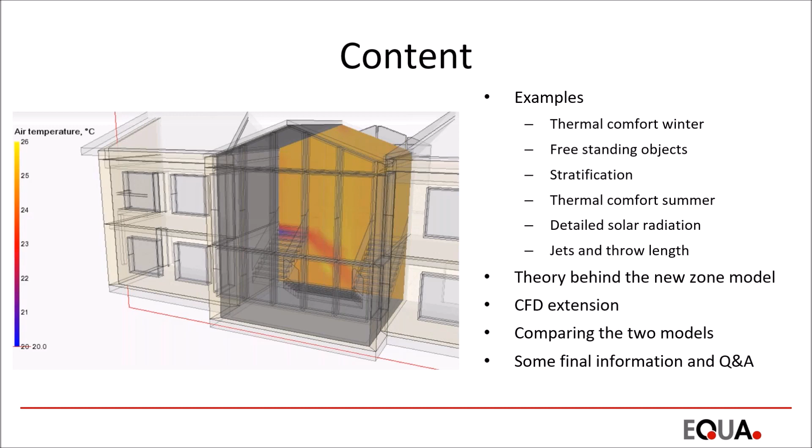So I'm very proud to show you this. Detailed studies in atriums is something I have requested for a long time, and it's so useful. So I will just dig right into IDA ICE and show you some examples. Let's start with an atrium.

Let's just import a file, an IFC file that I know includes an atrium. It's not that complex an atrium, but still it's a pretty normal case, I would say. So we start with thermal comfort winter - that's usually how I look at it: winter cases, summer cases, and then the whole energy simulation. I will not do that today.

So here we have the imported IFC. I convert the zone to a geometry, and here you see it. It's not that complex, but it has a complex roof shape and some triangular windows. This is nothing we could have simulated in great detail in IDA ICE 4, but in IDA ICE 5 we have these detailed zone models. So let's look into that.

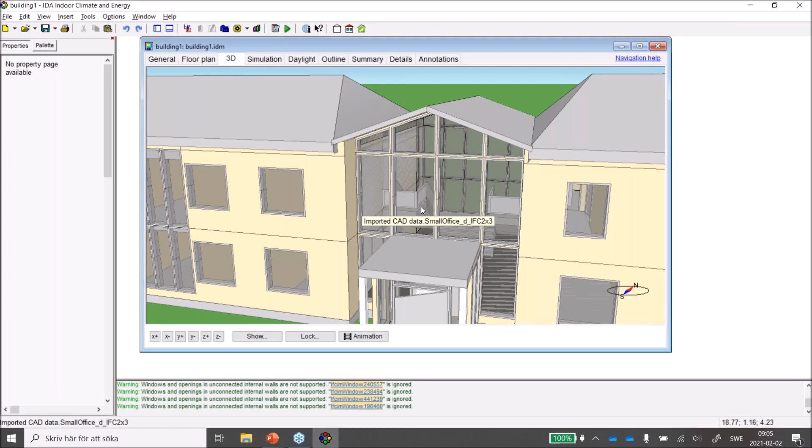So it's an atrium with big glass areas, so I think we'll have to heat it quite a bit to have good comfort. Let's say 22.5 degrees, and we need a heater - let's say 10 kilowatts maybe, and make it purely convective.

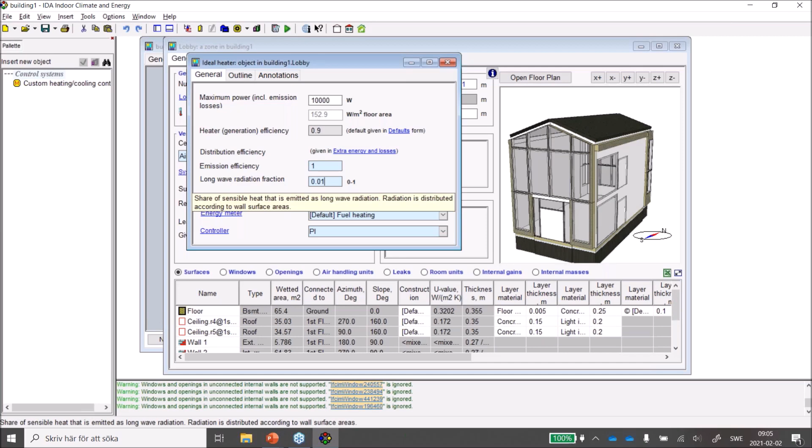I'm interested in the thermal comfort on the floor, or near where people probably may be working. So let's add a sensor plane or measuring plane - maybe you've seen that in our daylight tools previously, but we don't want daylight now, we want the new zone model. So we set up a measuring plane 1.1 meter above ground, and we want it to cover the entire space. Let's see if you can see that - maybe you can see this sensor plane here.

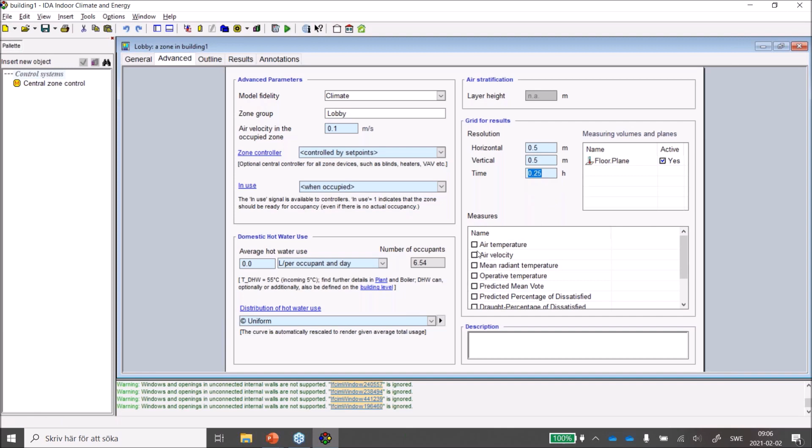We're almost done. We have the atrium, we have the sensors. Now we just need the most important thing, and that's changing to the new climate model. Here we can also increase the resolution of the grid if we want - right now it's 0.5 meter, and we log every 4 times an hour. I want to log air temperature and operative temperature. I think that's good enough for now.

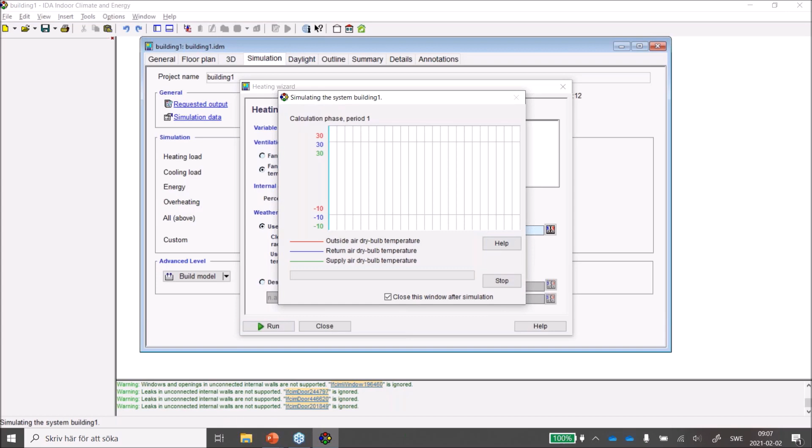So let's go to the simulation. It's a winter case, so let's make it really cold, minus 16 degrees. We have some internal loads as well, but they won't affect it much - just a few people in the room. And we are done. I just need to save that.

And we can look at the results. Let's take a section cut, and here you can see the sensors - these little black things. Let's hide them, and we can log the air temperature, and hopefully it's at set point. And yes, it is - 22.5 degrees. Nothing exciting there.

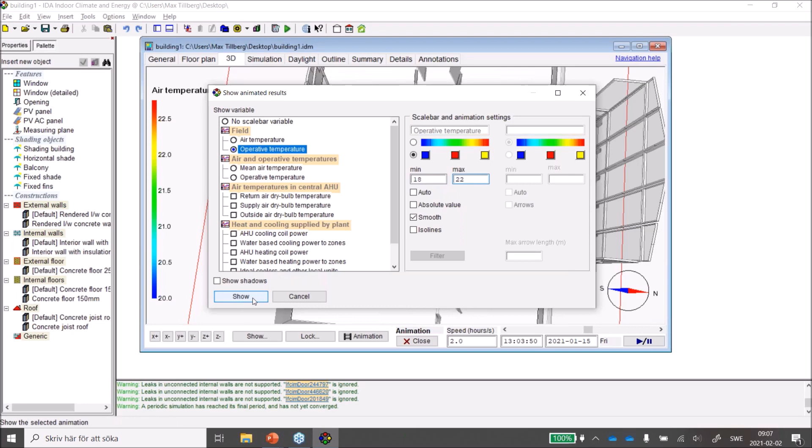But let's look at the operative temperature instead, and make it maybe 18 to, I'm guessing here, 22 degrees. And yes, so you can see here we have the effect of the cold windows in winter - here, here and here - but still we have the same air temperature in the entire zone. So let's look into the details, and we say, okay, this is what we would have gotten from IDA ICE 4.

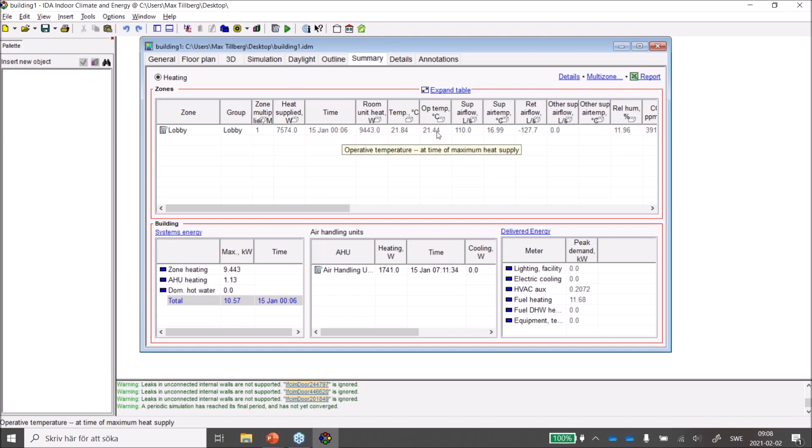It's an operative temperature of 21.5 degrees, so probably you're happy with that. But let's say the customer wants at least 20 degrees operative temperature to make the tenants happy. So we can log that. Just press here and see, okay, so 12 square meters of this entire zone was too cold.

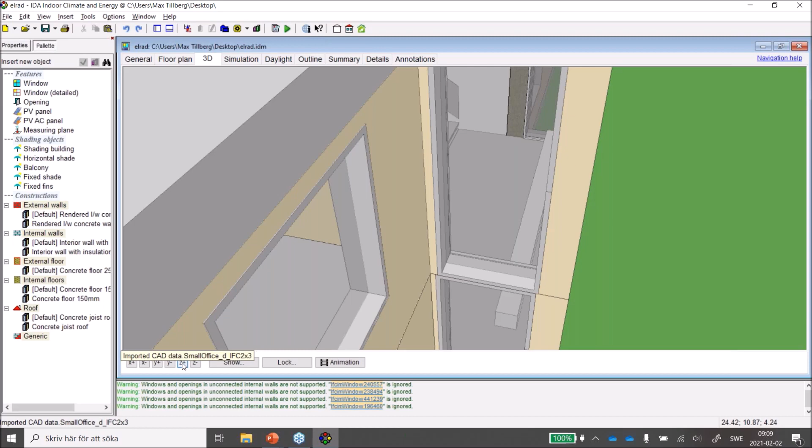So let's add a radiator, and I made that example to show you one of the most interesting features. As you're probably familiar with, radiators are always placed on walls in IDA ICE and all other building simulation tools that I know about. But now you can see this little box here - that's a freestanding radiator, and that's a new thing in ICE 5 as well, that we can have people, machines, and heaters that are freestanding but still part of the zone model.

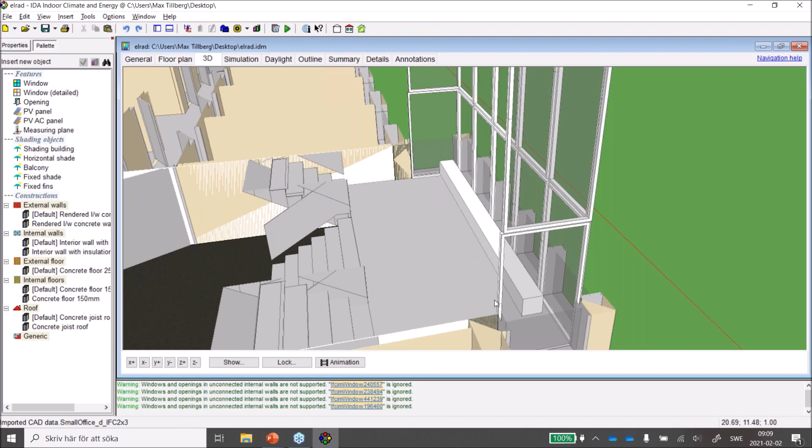So what I've done here is just have this electric radiator at 10 kilowatts. 10 kilowatts for that small radiator is quite a lot, so it will be very warm. But we can look at the mean radiant - well, let's stick with the operative temperature, and 30 degrees. And you see now that it's actually radiating in all dimensions. I think this is very useful.

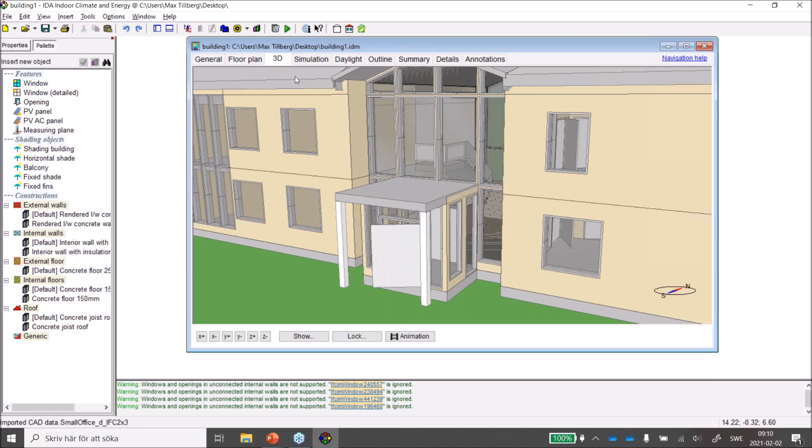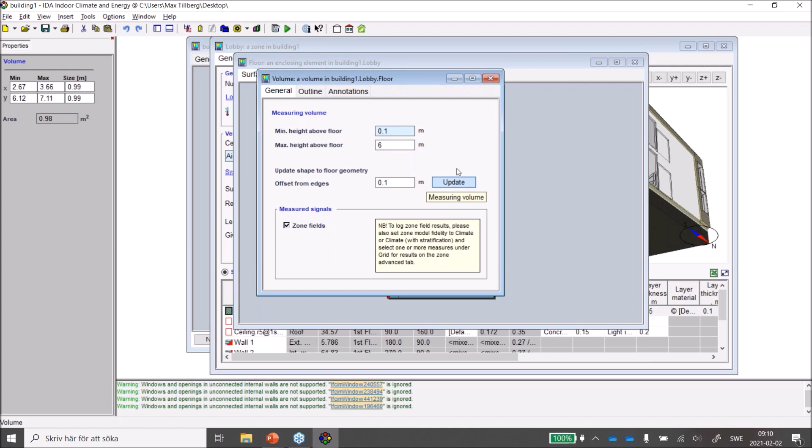So let's close this one and go back to the old example. We have the same temperature in the entire room as I've shown you. So let's look at the temperature gradient in height. Let's go into the room. We remove that plane, and instead we use measuring volume, and we say it should be set from edges 0.1, maybe 6 meters high. So now it goes up to this height roughly.

Instead of using the climate model, we use the new climate with stratification. So here IDA ICE calculates the stratification in the room, and it also takes air currents into account, for example downdrafts from windows, jets from ventilation, and so on. So we add maybe something else. No, I think we're happy with this.

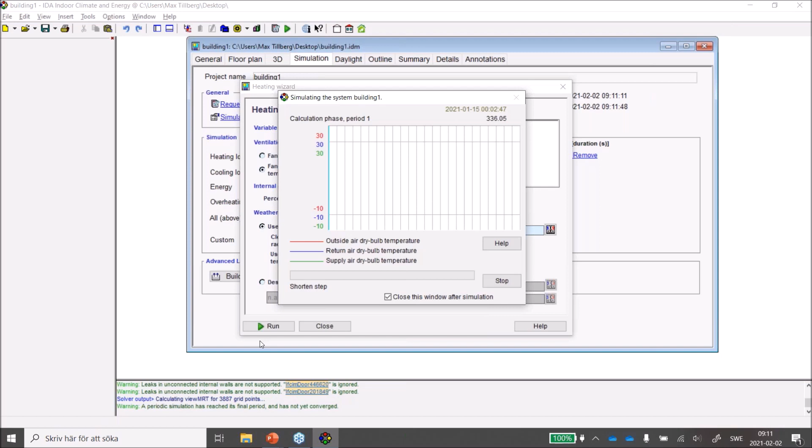And we have a resolution of 1.5 meters in height, so we have 4 layers in height - well, maybe 5, but 4 that we visualize. So let's run that one as well. As you see, I only run it for a single day. And here you can see the view factors - we calculated 3,800 view factors in this zone.

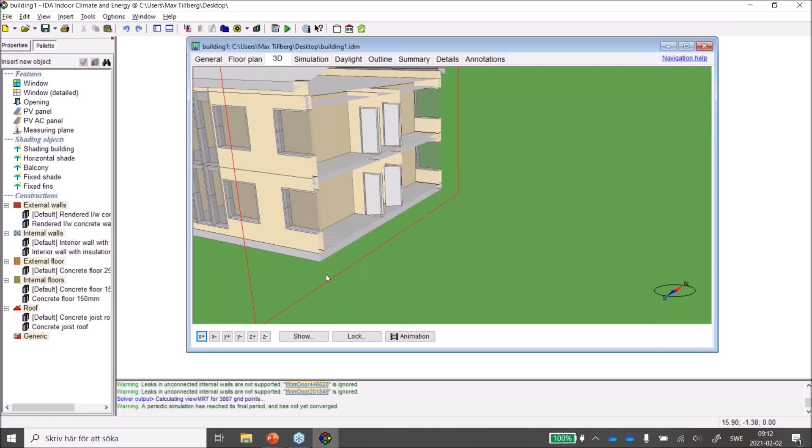Sensors. So now we can take section cuts. Let's take a section cut maybe here somewhere, and we can look at the air temperature. Let's say we look at the air temperature at 22 degrees, I'm not sure.

Aha, so here we see a clear gradient. So we have 22.5 degrees down here, and up to - it's hard to see, I need to change the scale slightly. Oops, yeah, so it's more than 26, 27 degrees at the top. And if we look into the operative temperature, now we see the effect both of the radiant temperature from the windows and the air temperature in height. So we take both these into account.

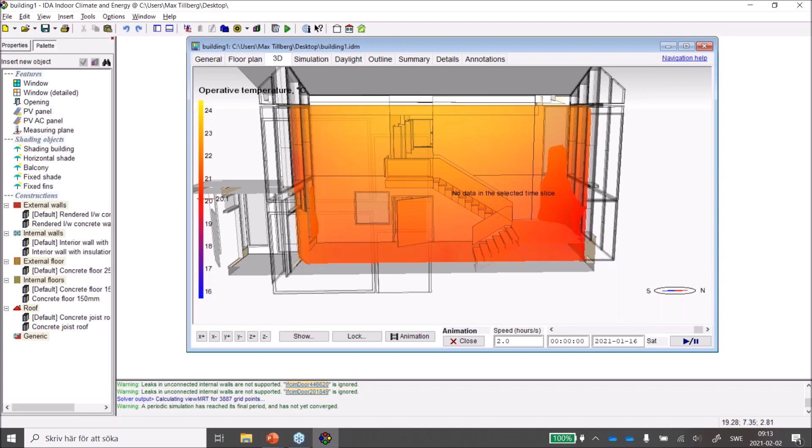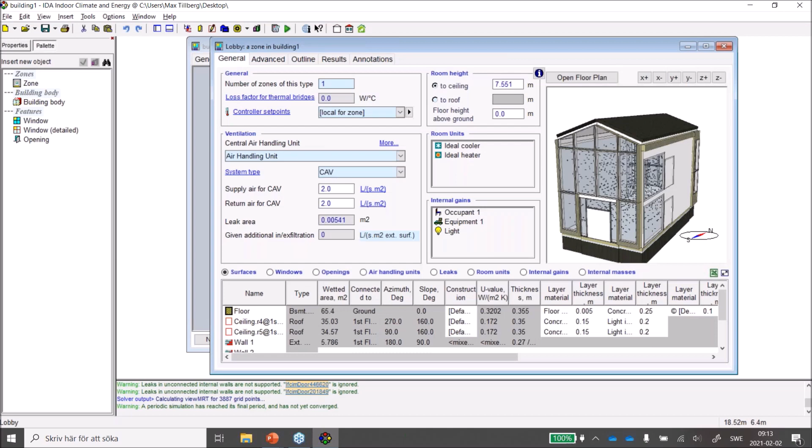So my third example is that I would like to show you a summer case, mostly regarding solar radiation. So we go to the simulation tab, and let's choose a synthetic summer day like that, and we need to log more about radiation. So let's log illuminance - I think that's a good start. Maybe something more, we'll see. And we run that simulation.

Cool. Take a few seconds - the summer simulations take a little longer than the winter cases because they are so static. I fix the outside temperature, but these take the dynamic aspects into account. And this is probably the most important thing of these new zonal models, that you can simulate days or years in very high resolution. Of course, you need to be aware of logging because you can fill your hard drive quite easily.

Yes, I made this mistake here, but I think that's enough. I think we need to limit just to make one simulation. Yeah, that's it - tried to find the worst case scenario, so it ran a number of months, but I only want to show you one month right now.

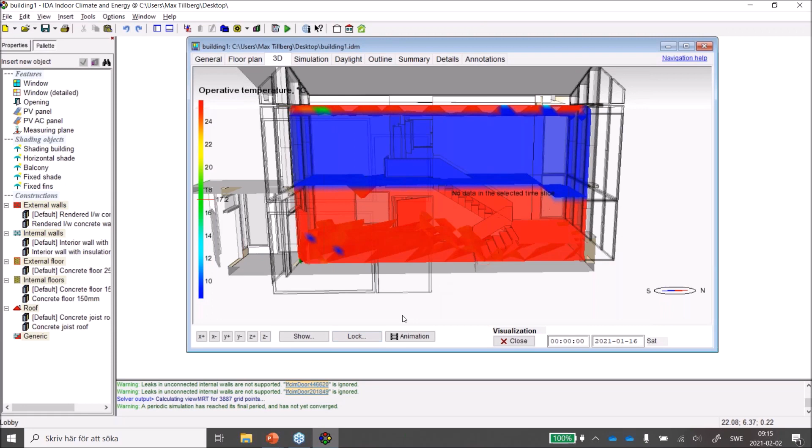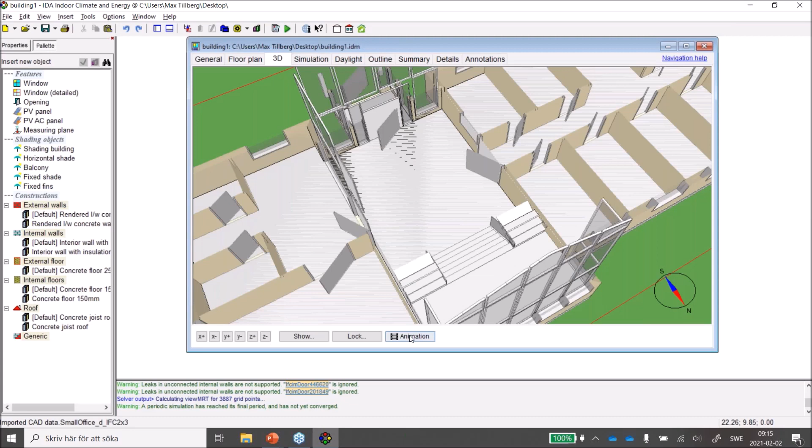Okay, so let's look at the illuminance in this room. We can rerun that simulation. There it is, illuminance. You can see here the solar radiation in the morning, and then it goes around. Here we have illuminance levels, quite high, about 80,000 lux.

And we could, if we want, show the shadow animation at the same time, so you can see that. Okay, seems to work. Very crude, it's just half a meter in resolution, but still I think it's very useful for what I want to show you.

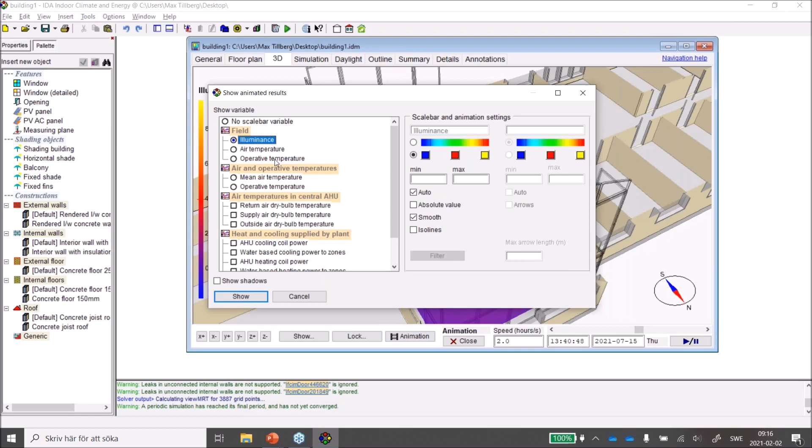And then we could show the operative temperature, and as you see, you don't see this pattern in operative temperatures. The reason is that we don't take solar radiation into account, or at least we didn't used to—no one did. We only take the surface temperatures for the glass.

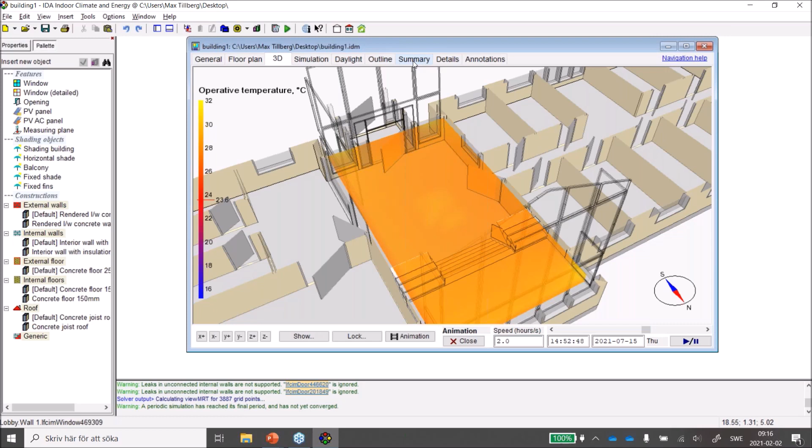But now we have a possibility to do that. So let's go into system parameters and start considering shortwave radiation. Let's resimulate that, and hopefully we'll see both illuminance levels changing, but also the radiant temperature, and also thermal comfort, for example the PPD index. Let's take a few seconds to run that simulation.

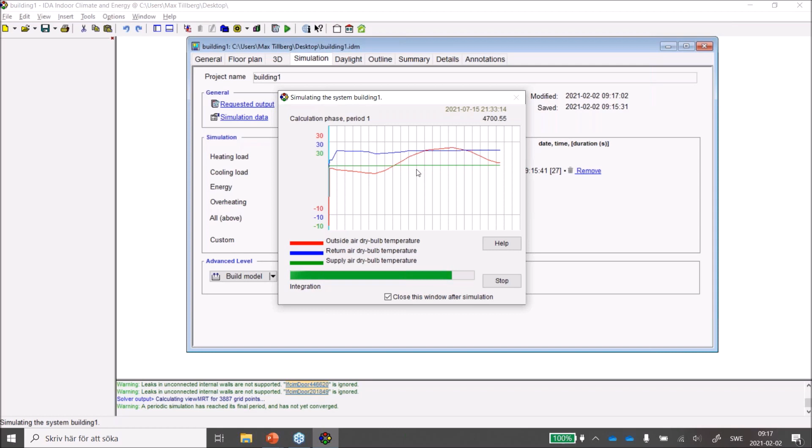As you see, it's quite fast. I'm surprised, because I haven't shown you any details about what we do there, but it's quite a lot of complex simulations going on under the hood.

And we log the operative temperature. Set it to 30 degrees. And yes, here we go. So you see that the operative temperature—actually, you can clearly see the solar radiation in this animation, how the sun moves. I'll show you that maybe a bit clearer, like this.

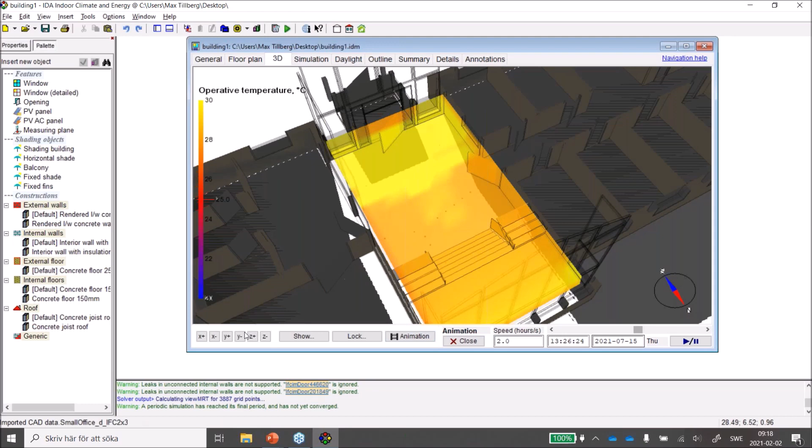Maybe in a real project I would have increased the resolution slightly. Just a few more things I'd like to show you. The surface temperature is the same in this zone right now, but that's not necessary. I'm not sure if this is a good idea, but at least it's possible to subdivide the space further.

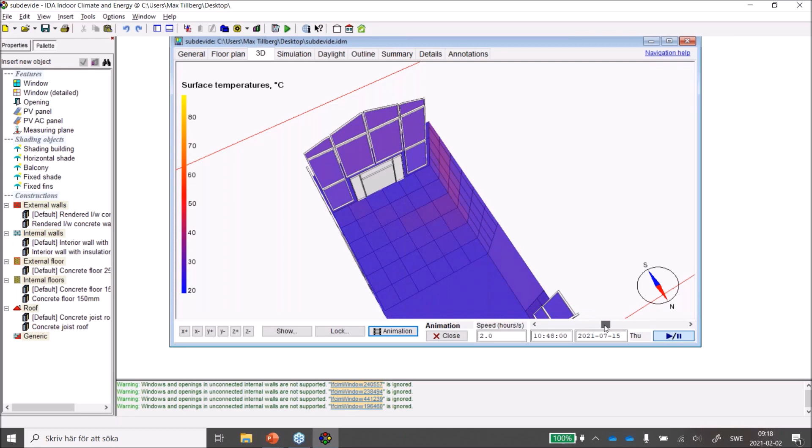So this I have done manually by wall parts. But if you see here, let's log surface temperatures, see if that's possible. Let's change the scale slightly, make it 20 to say 35 degrees. And here you also see the solar radiation heating parts of the room.

This is not just the new zone model, this is also for the old energy model. So this is not actually a new feature in IDA, but as you see you could take this into account—say that the floor near a window will be warm, and that will of course also affect the thermal comfort. But we don't have any 2- or 3-dimensional heat transfer, so you need to be aware that you cannot make these too small, probably.

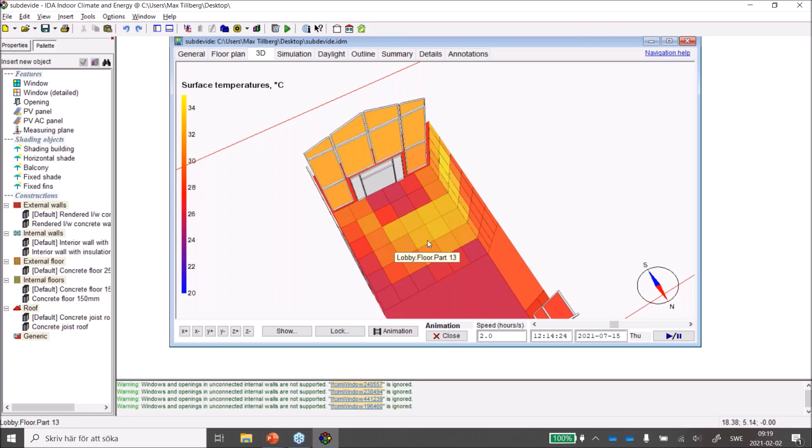So my final example, I have one minute, is to show you an example where we have jets. Let's just open that simulation. So we have the same building, but in slightly more detail, and we have added ventilation here, and also a sensor. This sensor can be placed anywhere you want in the room, and it can be connected to measure all these things that I've shown you.

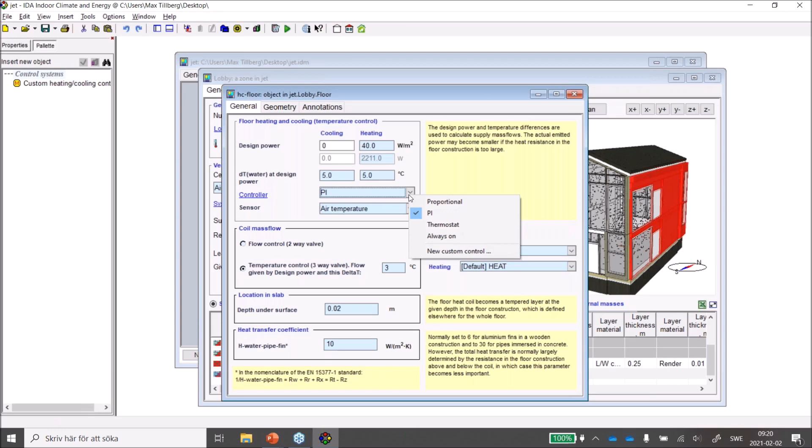For example, we can control this underfloor heating with this air temperature, and also the operative temperature from the occupant. We can sense that, or we can make our own custom simulation, custom control system by just choosing that one—maybe some kind of proportional controller, this one—and there is the sensor, the air temperature, and we can control the heating signal to the underfloor system.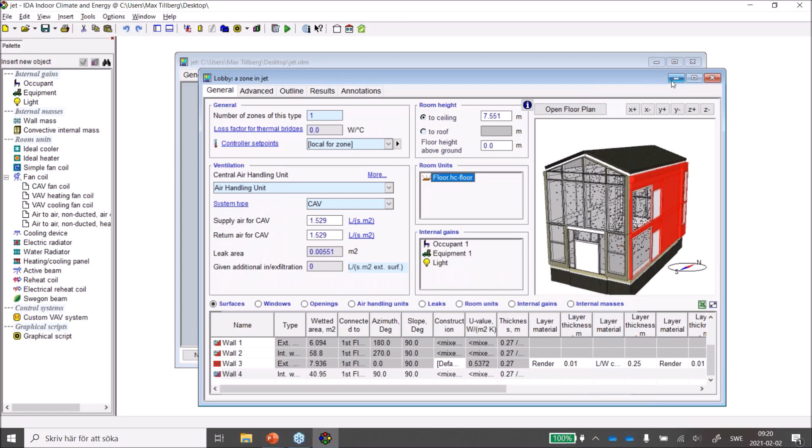But what I would like to show you is that it's also possible to calibrate these inlets, these supply diffusers. I'll take one more minute. I can show you the product—it looks like this. From the manufacturer we have the airflow, we have the size; at 5 meters here we have an airflow with an air speed of 0.3 meters per second.

So what we did was add a box like this with this inlet, and we also just tried different sizes in IDA with a given airflow, 33 liters per second, and simulated that. I can show you how it's done.

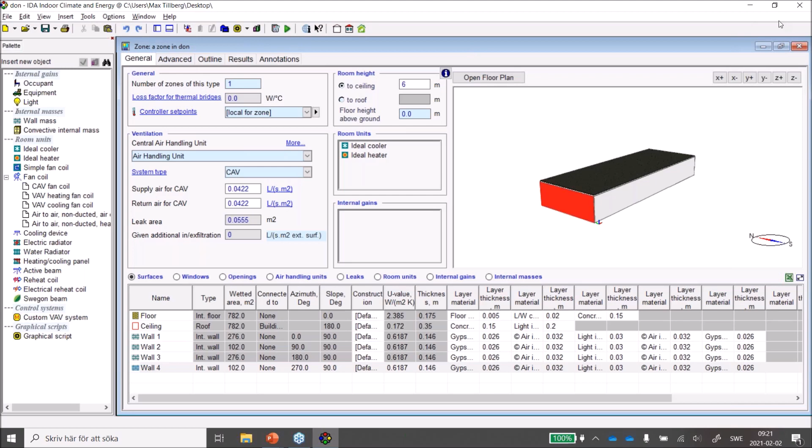Just show it in 3D. I'll show the air velocity, and here you can see the air velocity, and then we can limit it to 0.3. If you look carefully down in the right corner, we see that we have 4.91 meters away, and according to the manufacturer's data that was 5 meters.

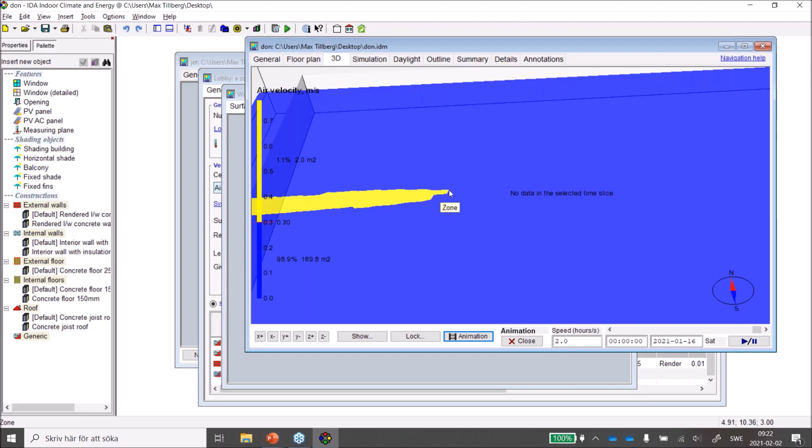So then we know that this inlet will work, and we could add that into our simulation model, and that's what Niklas will show you later on, and also myself. But before that, Walter will tell you about the details in this new zone model.

So hi, as Max introduced me, I'm Walter Fornari, and I will talk about the basic idea behind the new stratified zonal model. So the new zonal model is actually a simple 1D layered finite difference model.

Oops, sorry. Can you see my screen? Can you see my screen? Yes, we can see it.

Yeah, so it's based on a simple 1D layered finite difference model that typically works very well in predicting vertical temperature gradients in pure displacement situations. However, now this has been augmented by considering explicitly the streams from individual flow elements. So for each flow element, we compute its path, and we compute the volume of air that is entrained along its path. So as a consequence, we find what is the net mass inflow and outflow in each layer, as well as the net injection and removal of energy.

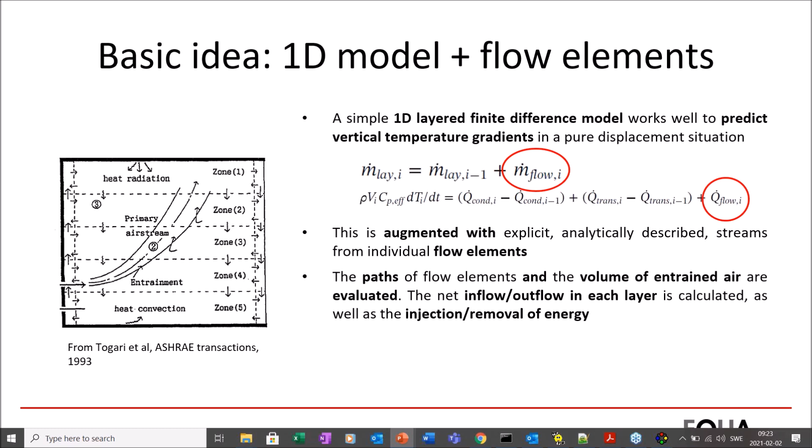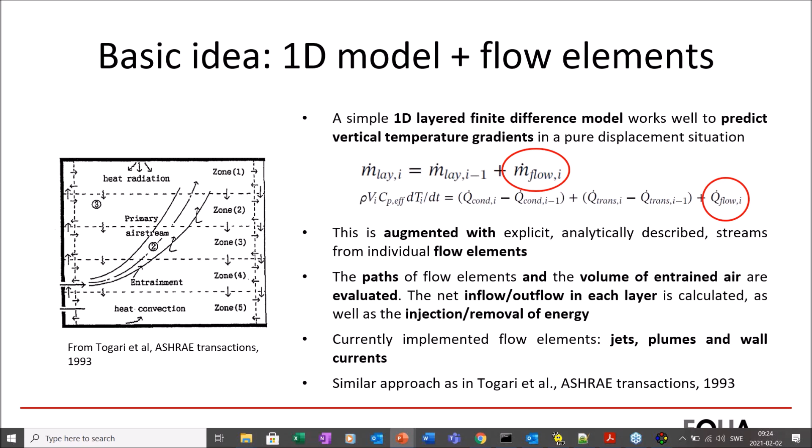And by using this information and by evaluating the corresponding transport and balance equations, then we are able to predict the evolution in each layer of the mass flow, the temperature, the CO2 fraction, and the vapor fraction. So the flow elements that we have implemented right now are the jets, the plumes, and the wall currents. And let's focus at first on jets and plumes.

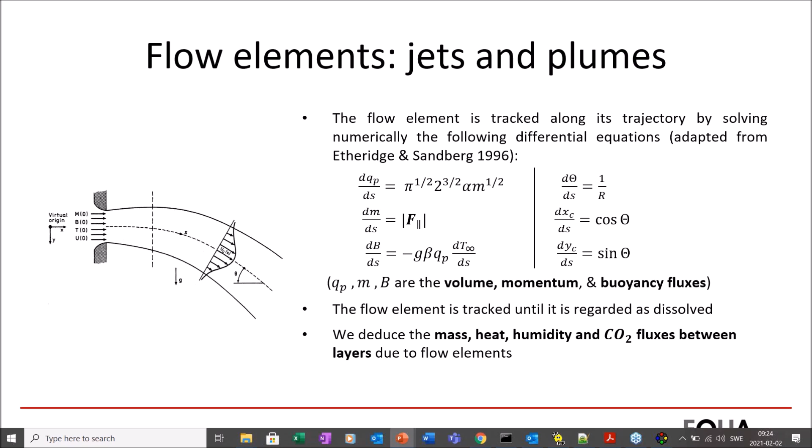So these specific types of flow elements are tracked along their trajectories by solving numerically a set of differential equations, which tell us how the volume flow, the momentum flow, and the buoyancy flux evolve along the trajectory. And of course, these types of flow elements are tracked until they are regarded as dissolved, so until either the velocity or the volume flow or both of these variables are below a specific threshold. And as I said, due to these flow elements, we're able to deduce the mass, heat, humidity, and CO2 fluxes between all of the layers.

There are some very important driving parameters that control this type of flow elements. So of course, if you have an isothermal jet, then you know that the driving parameter is the momentum flow at the origin, so at the terminal. However, when you consider non-isothermal jets and plumes, the other very important driving parameter is the specific buoyancy flux, which is basically the rate of production of weight deficiency.

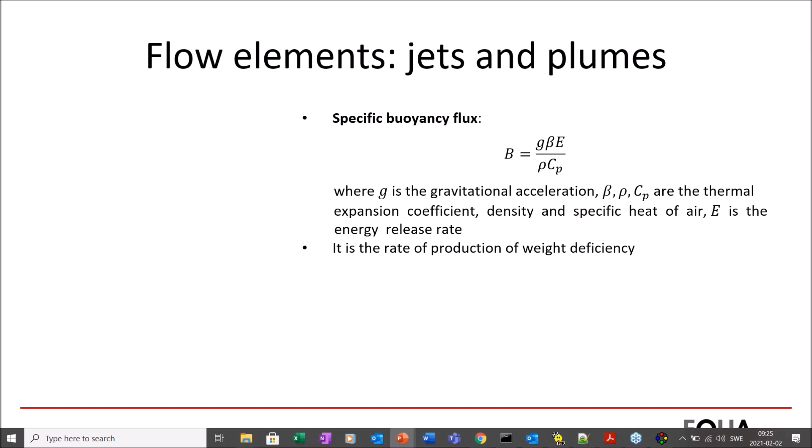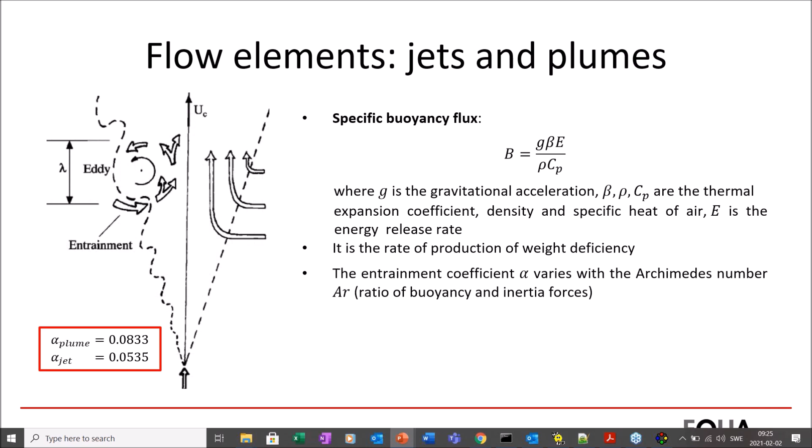Another very important parameter is the entrainment coefficient, alpha, which basically is a coefficient that tells us how much air is entrained, how much air is engulfed within our developing flow element. And in IDA, this entrainment coefficient varies with the Archimedes number, so basically with the ratio between buoyancy and inertial forces. And it varies between the value for a pure isothermal jet and the value for a pure plume.

And finally, another concept that we need to solve the set of differential equations is that of a virtual origin. And basically, the virtual origin is the location where a punctual source of buoyancy or momentum would generate a similar flow element to the one that we are considering. And just to be complete, we use what is known as the maximum rule to estimate this virtual origin.

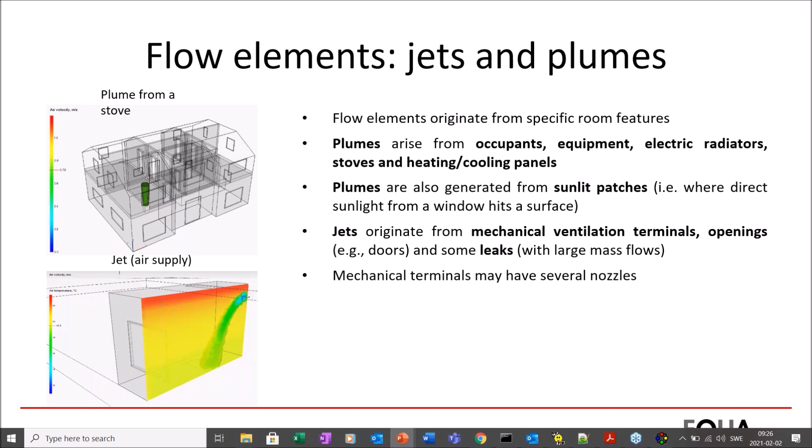On the other hand, jets originate from mechanical ventilation terminals, from openings like doors, and through some leaks through which the mass flows are quite large. It must also be said that mechanical ventilation terminals can have several nozzles, which means that a single terminal may have several jets. And we should also say that these kinds of flow elements can undergo wall attachment and detachment, for example, due to the Coanda effect.

Finally, the last type of flow element that we consider is the wall currents. And these are particularly important when you have an external surface, so either an external window or an external wall, which is substantially warmer or colder than the air in the room. So in such a scenario, the air that is close to this external surface would be either heated up or cooled down, and as a consequence of this, it will start either rising or sinking along the wall, therefore creating this specific type of flow element that is known as wall currents. And this is handled in the way proposed by Togari in 1993.

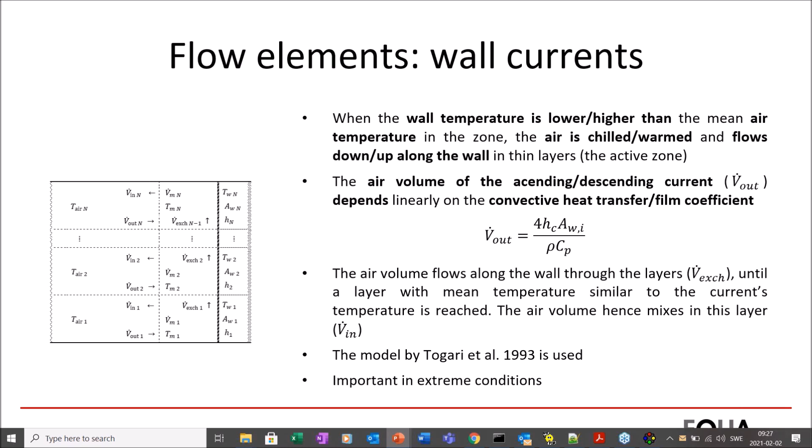We also have some other very important features that were implemented in the new zone model. So for example, we have implemented the view factor library that was developed by Walton in 2002. And this is used to account for non-convex geometries and obstacles, and therefore this lets us improve the estimation of the long wave radiation between surfaces. And this library uses several algorithms, and the most interesting one is the single area integration algorithm merged with the adaptive division of our surfaces.

And this algorithm is recursively calculated until a specific convergence criterion on the view factors is fulfilled. So we have a very good convergence of our view factors. And apart from this, this specific algorithm, together with the adaptive division of our surfaces, is particularly suitable when you have to calculate obstructed view factors.

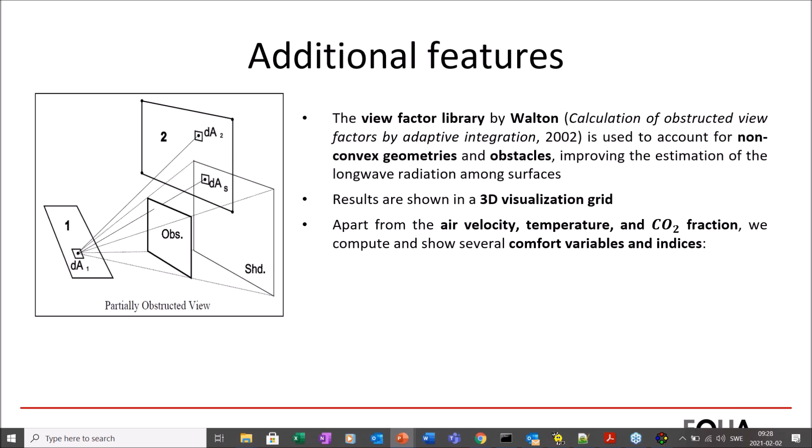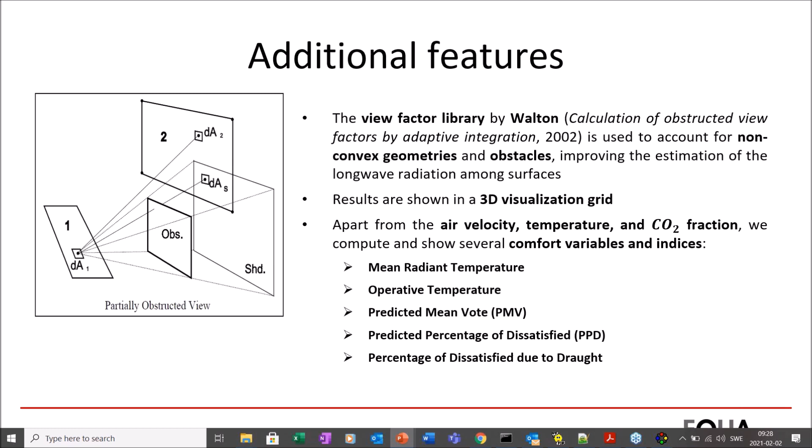Finally, we have also implemented, as Max has been showing you till now, a 3D visualization grid. And in this visualization grid, we show air velocity, temperature, CO2 fractions. But we also compute and show several comfort variables and indices as they are defined in the ISO 7730. So we compute and show the mean radiant temperature, the operative temperature, the predicted mean vote, the predicted percentage of dissatisfied, and the percentage of dissatisfied due to draft. Of course, we have performed several validations, and all of these validations have typically given very promising results.

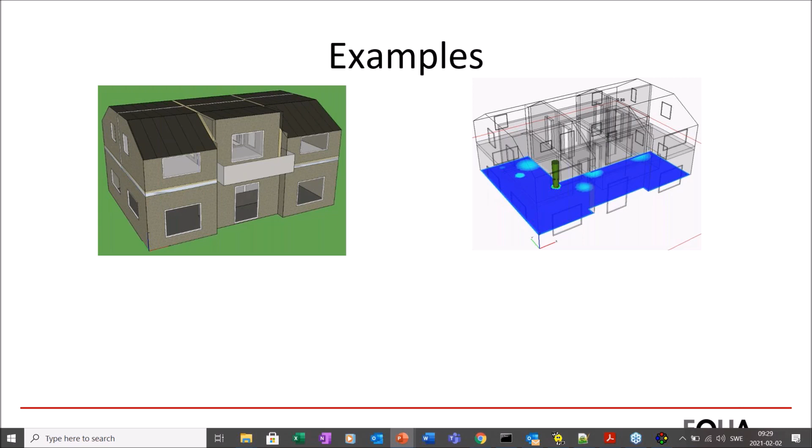So now, before concluding, let me just show you quickly some other examples. Here, I take again the same zone that I showed you before with a very intense plume that is generated by a cubic stove. But now what I want to show you is the weaker plumes that are generated by moving sun patches, as you can see. And here instead, I show you a large open space office in which we have computed and shown the predicted mean vote with the new climate zone model.

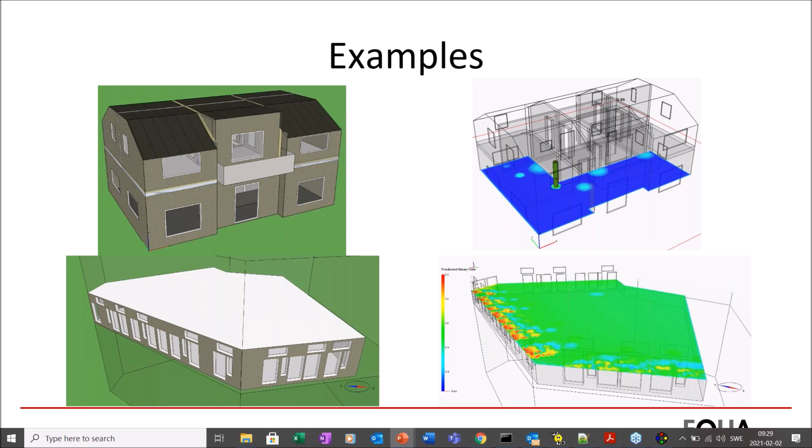So with this, I finished, and I give the word to Niklas, who will tell you some more words on the CFD extension for IDA ICE. Okay, thank you, Walter. So I will continue to tell you something about the CFD extension, and it has been around for some time and out for testing. It's still in beta state. And presently, it's not released for ICE 5, but ICE 4.8, since we have 4 testers there.

My part, after all this new zone model, which looks pretty much like CFD results, actually, why do we need a CFD extension? The thing is with the new zone model, with the climate model that Walter has developed, we have added sort of resolution in the vertical dimension. In CFD, we add the 2 remaining spatial dimensions in X and Y. So we have a fully 3D representation of the flow or temperature and other fields in a zone.

But one important thing is that we remove the time dimension. So with CFD, we get a three-dimensional, in a way, true flow field in a room or in a zone. But since CFD is so expensive, we will restrict ourselves mostly to steady state simulation. That is, we select an instant in time and perform the CFD simulation for that instant. We can do in IDA ICE transient simulations, but then it's the flow field that's transient. The boundary conditions that we grab from the IDA ICE simulation as input, they are still steady state.

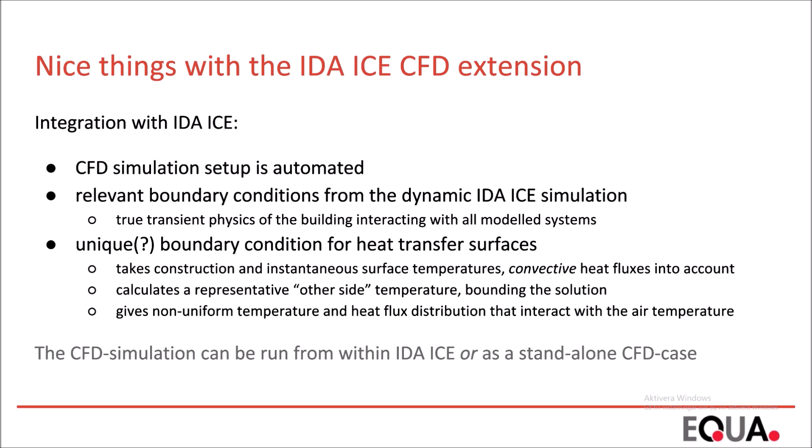We also can run the CFD case fully within IDA ICE. But I've been careful to try to implement it so that it's possible to run as a standalone CFD case as well, because there are experienced OpenFOAM or CFD users who'd like to experiment with the cases in the way they are used to. So we can export the case from IDA ICE and continue running it in command line mode, uncoupled from the IDA ICE case.

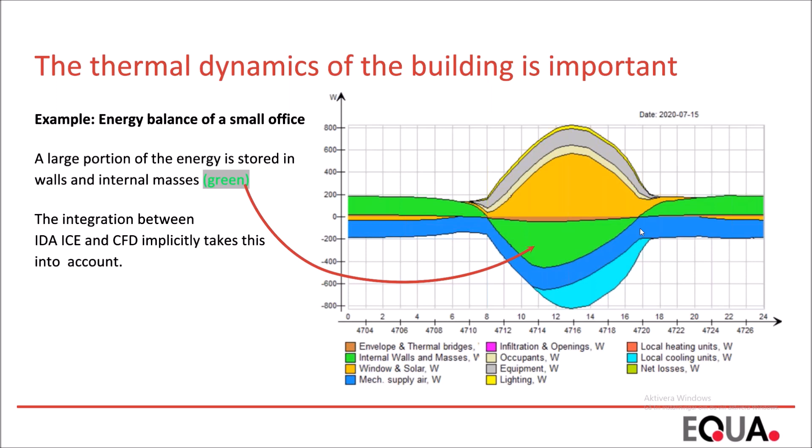A bit of background, still under development as always, but the CFD model, as many of you have heard probably, is based on OpenFOAM, open source CFD tools from the OpenFOAM Foundation. We have written an interface between IDA ICE and OpenFOAM in C++ and the IDA ICE code. Since OpenFOAM is open source, it has a certain license that requires us, and we also want to, share the OpenFOAM source code that we use, for instance the implemented boundary conditions and so forth. So for license users, the entire source code for the OpenFOAM development we do is available.

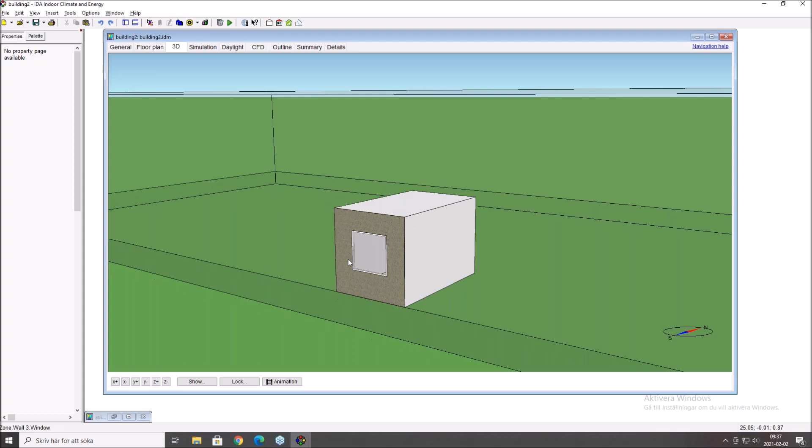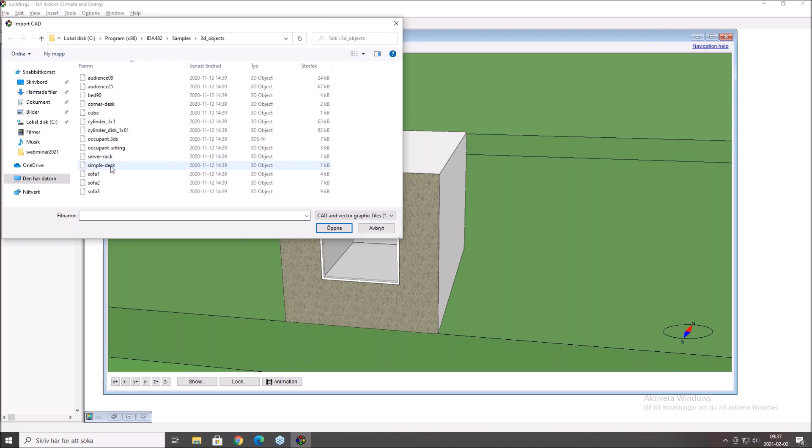My next step here is to show you a quick, very short walkthrough, I think I have like 5 minutes, of how this works in CFD. So I will start out with a standard box office, and we want to do a CFD simulation on this. First, we have to do an IDA ICE simulation, of course. But maybe we want to have some geometry inside this, and we can select from our samples folder, perhaps a sofa.

It will end up in the corner, and in the sofa we want someone sitting. So we select this as well. We have a sitting occupant here. This guy is sitting in the wrong direction, so I will rotate him 90 degrees. And then we have to move him back. So sit there nicely. Now we have these, and we just move them into the zone and see that they are positioned.

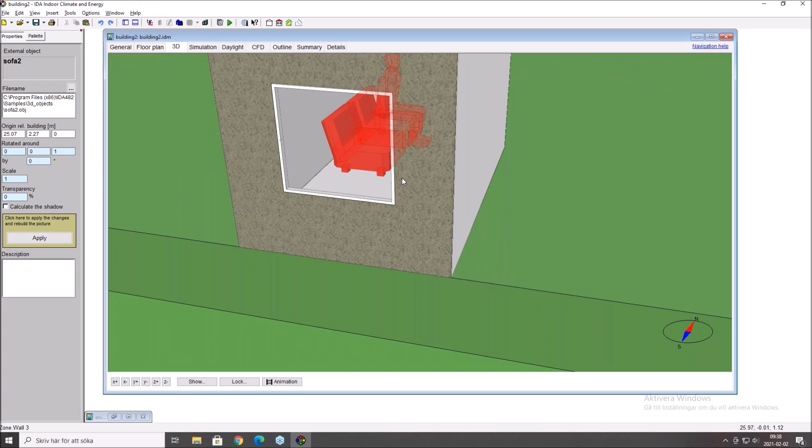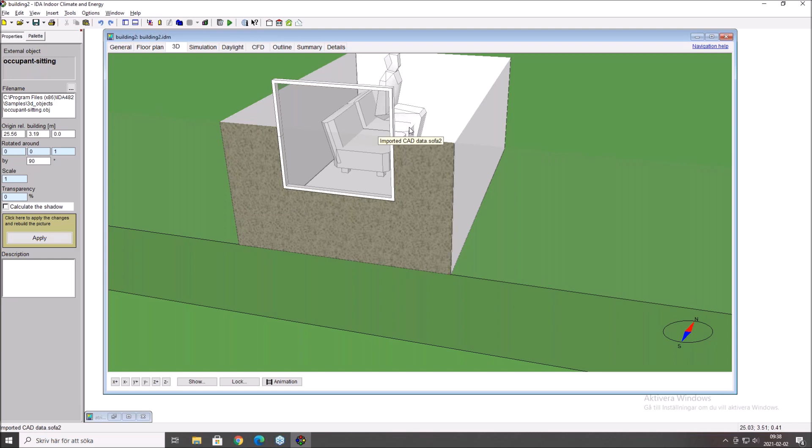So now we have an occupant sitting in a sofa, and this occupant should then represent the occupancy internal load. So I give this occupant a role. I connect it to the occupant in the zone. The furniture here I can connect to furniture. I give that a furniture role because we always have furniture in a zone. So maybe we have to move it a bit.

That's there, like that. You don't have to be very careful when importing objects. So now let's perform a simulation. I've probably forgotten something by now. Yeah, I forgot to add some nice heat. Let's just add a radiator to this one.

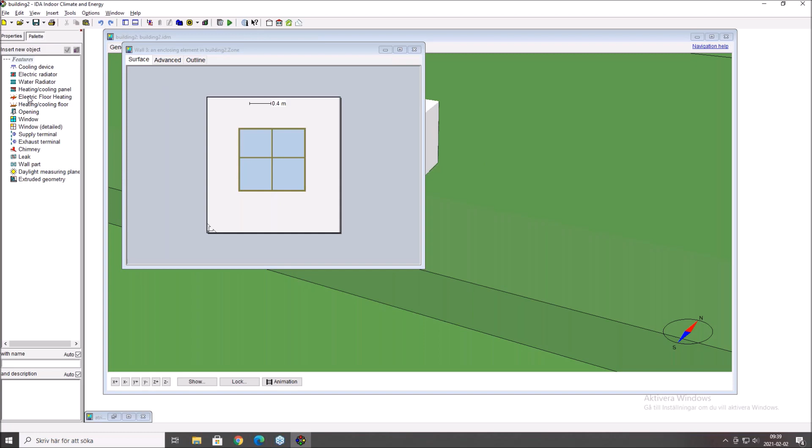Standard procedure. Put water radiator below window. Give it some capacity, and we perform the IDA ICE. This is the zone simulation, just not using the new zone model. It's the old zone model in this case.

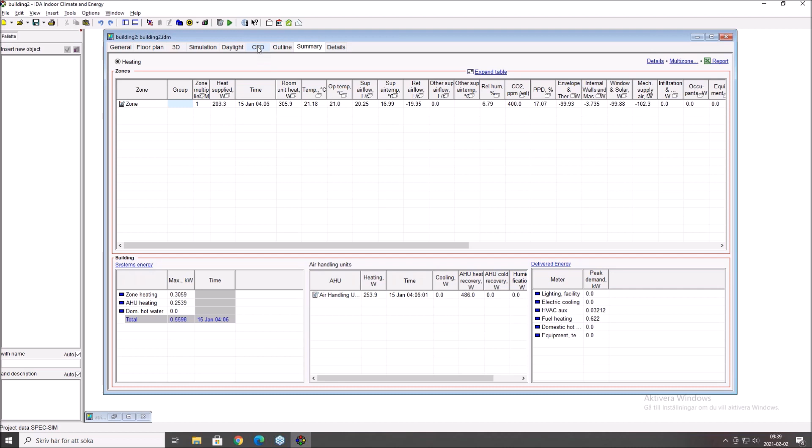So we have the details here from the results. Then we will select some. This is probably not very interesting, but let's decide that here is an interesting time to look at using CFD, at 2 o'clock in the afternoon. And I will then go to the CFD tab.

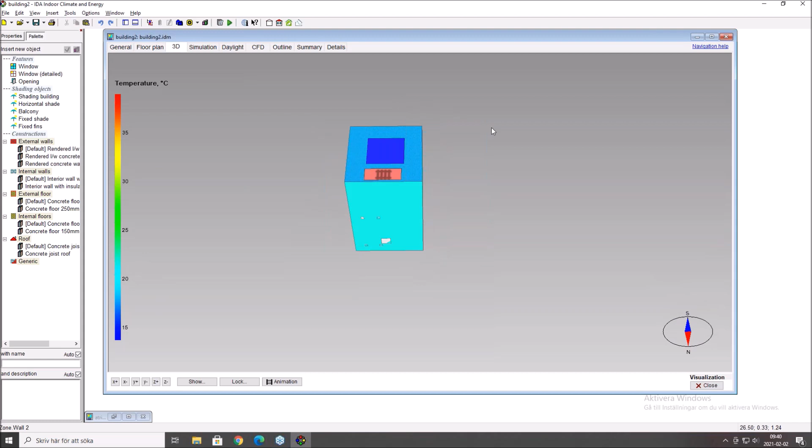I select my heating simulation. I select my zone, the zone I want. I can have several of these. And I select my instant or time for CFD, 2 o'clock in the afternoon. And here we see the boundary conditions coming from IDA ICE. We can look at the surface temperatures from IDA ICE, slightly warmer radiator there, colder window.

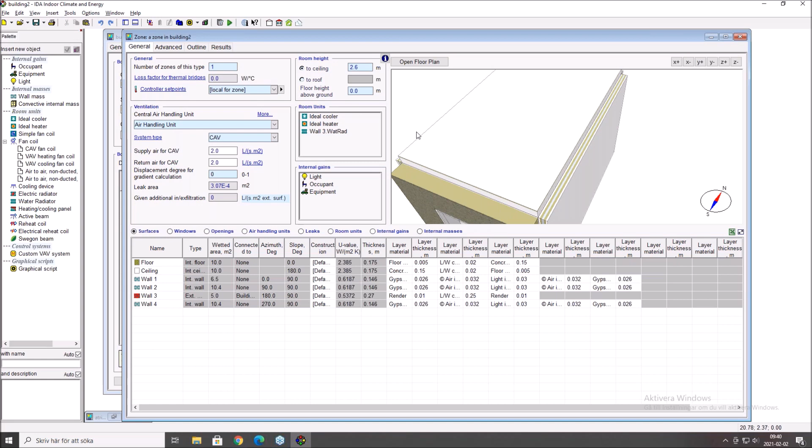We can also visualize the airflows. And here's a supply terminal, and here's an exhaust terminal. But we have forgotten to define that in the CFD model. So let's do that. We have to specify in CFD where these are, or we should do that. It's not a must, but we should do it. So let's add a supply terminal to the ceiling.

So now this would be the supply terminal instead. And this one we can give some parameters. We can give it a swirl angle, for instance. It's like a swirl diffuser that should attach the flow to the ceiling using a Coanda effect. Give it a pretty strong swirl. These numbers one has to experiment a little bit and get to know them. So there we have the supply terminal with swirl.

Where is my terminal? I want to see the zone window at the same time, and my presentation thing is in the way. So how do you? Yeah, okay.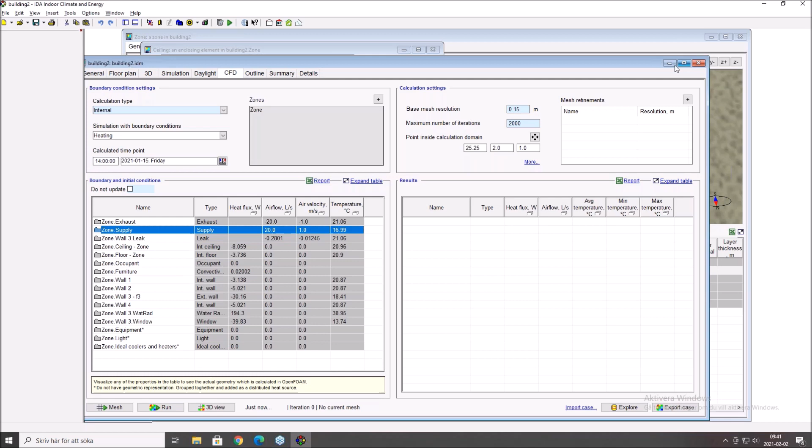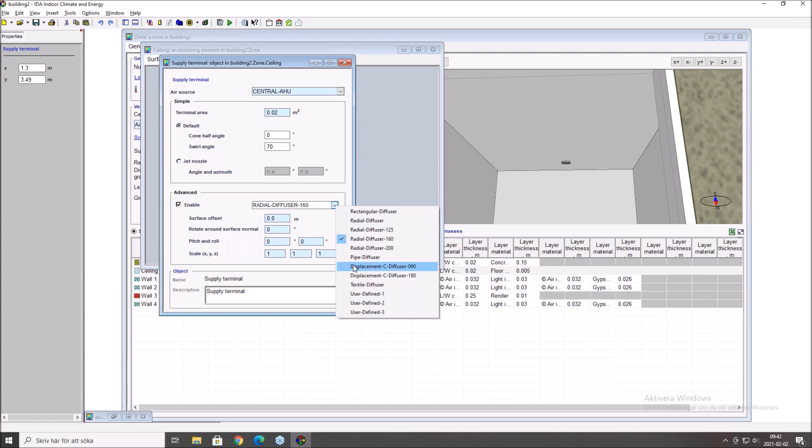We also have the option to add some simple geometries that will then represent my terminal. Like you can have a rectangular thing here. That would be like a grill or something. You can scale it. We can rotate it. We could have a small radial diffuser. We can have a pipe, for instance, that sticks into the domain somewhat. Then we have to scale it down because now it's a huge pipe. But for now, let's disable this and keep this swirling supply terminal. And then, just to know where it is, let's put the exhaust terminal there.

And now we should be ready, I think, to perform the CFD simulation, which is just a matter of pressing. Since this is a demonstration, I'll make a really coarse simulation with large cells. Otherwise, it will take a long time. So the smallest cells that I allow here is 5 centimeters. That's too large for a serious simulation, but for now. And the largest cells is 40 centimeters in this zone. So let's just try to simulate it.

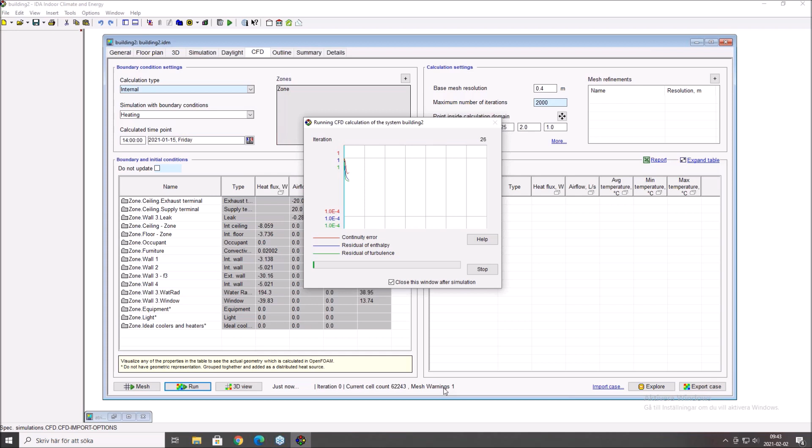First thing, it sets up the CFD case and then creates a mesh. A mesh is the discretization of the entire zone into, in this case, like 100,000 small, what we call cells, or mini zones. We can see here we arrived at 62,000 cells, and we had a mesh warning, but that's usually not a problem. And now the solver is running,

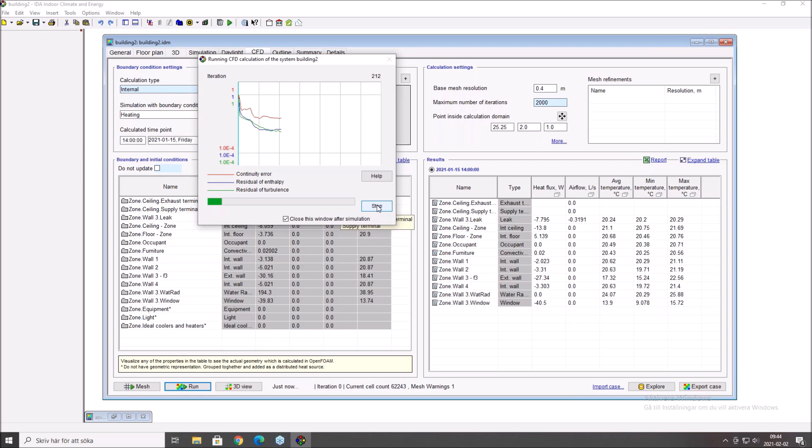which we can see in this counter, and also the resulting boundary integral values shown in this table are updated. They should be similar to the input, but they are not identical because it's based on a different model with input from this model. Okay, so we have made some iterations. Normally we would let this go with a finer mesh for about 1,000 or 2,000 iterations. I will stop it now, convert it into a visualization format, and now we can use it.

So first, in the 3D view here, we see that we have a mesh. It's a volume mesh, so the entire thing is filled with these cells. And we can show, for instance, air temperature on the surface. So we see the radiator has some hot plume rising up here. We do not see much effect from the inflow. Maybe I forgot something there. But let's have a look at the inside in the volume.

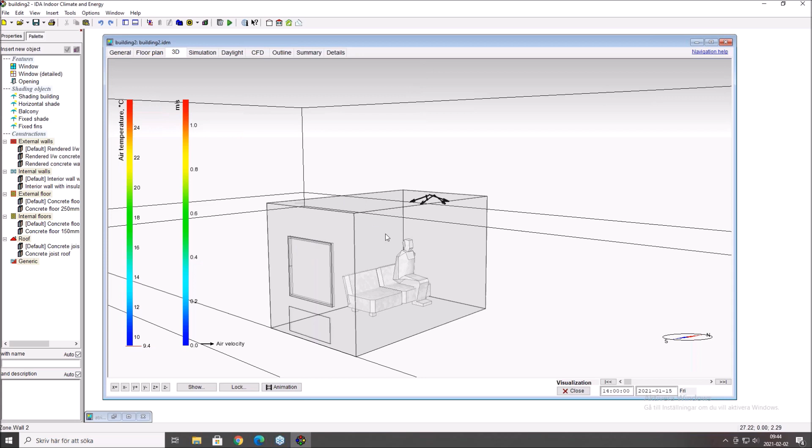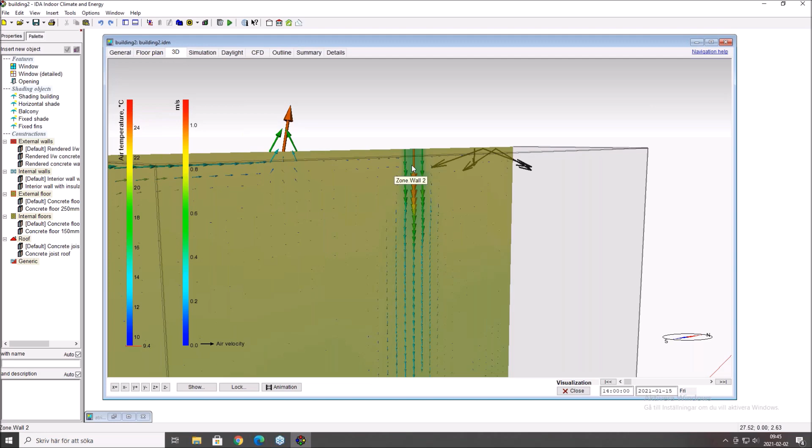Yes, actually, I forgot to update the simulation, so my nice swirling inlet is not taken into account. I needed to do some refresh. Anyway, we see the inflow in this case from the default supply that still remains. Slight error on my part. But that was my demonstration on how you work with the CFD model. It's quite simple, actually. If you have very complex models, you will have extremely large tables here.

Let's see, how much time do I have? I've spent about 10 minutes, right?

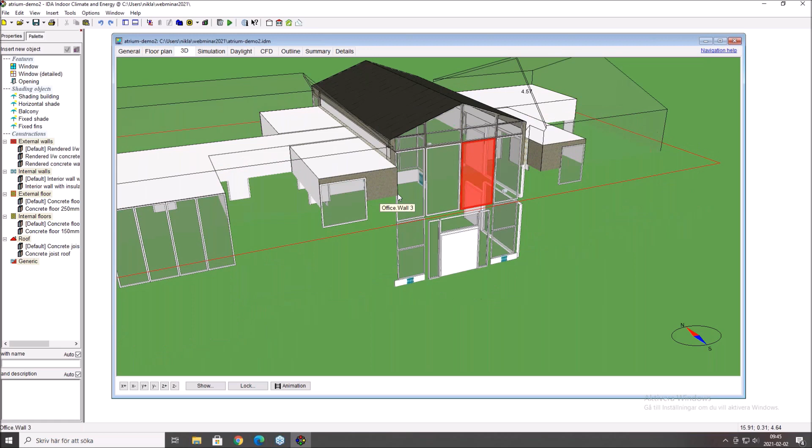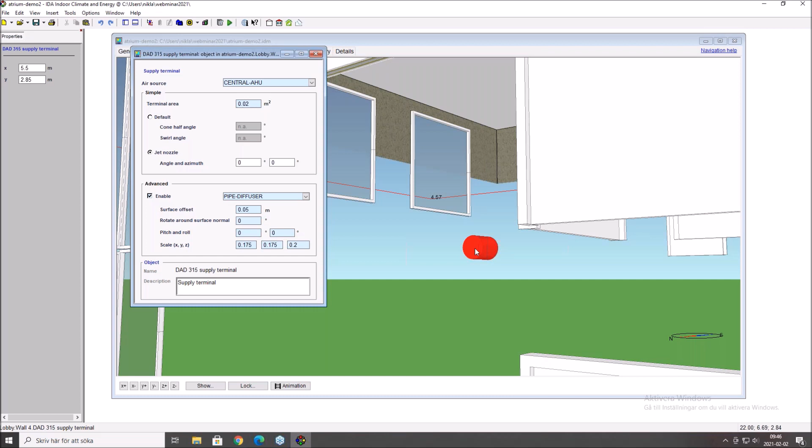I can just quickly show the Atrium case. In this case, I will not run this. Here we can see that I have added, like this. It's upside down. Yeah. So here I have selected to create some jets, supply terminals, the ones that Max showed. Now here we have a pipe diffuser and we have a jet nozzle. So this is actually a geometrical supply that will be meshed and discretized in the CFD model.

Otherwise, in this model, I have not imported any stairs or anything, but let's just show the... So now if we set this to a very coarse simulation, we see that we have the boundaries here. It's a lot of them, and here we can visualize it as we did previously. The surface temperatures, and we could actually just run this with this extremely coarse mesh. It might work. But it will be at least pretty quick.

So again, the case is generated on the disk, and the entire atrium is decomposed into small cells distributed into this. And now I'm running on 6 processors on the computer, and soon the solver will be starting. So I think that I will have to end there, actually, just showing that the simulation actually runs.

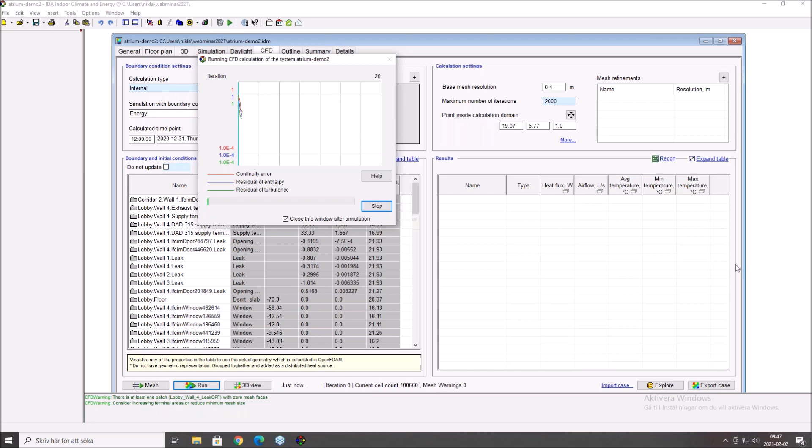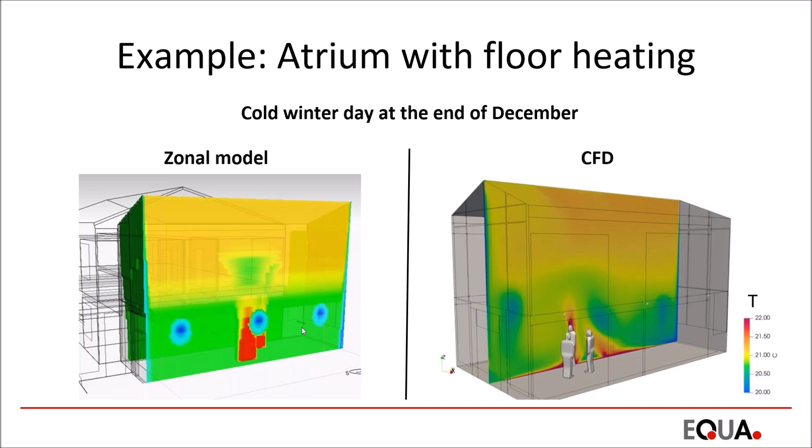Of course, if we look at the airflow, that was another question we got. Can we calculate downdraft at windows? Yes, you can in the new zone model. You can see it here in both models. Here you can see the warm entrance. That's why we don't have the temperature here, and here we have it over the entire facade. And you can see the jets coming here, the blue, the greenish things, and also the plume from the persons.

And you can see similar in the CFD. You can clearly see the plumes, the jets. You can see the plume, and you can see these corners when you have this downdraft. The biggest difference, I would say, is this. You can see on the floor you have a big swirl in the entire room. It's not very fast. It's quite slow. It's lightly blue, but that's not visible, and you cannot see things like that in the new zone model.

We also got a question: do these plumes affect each other? In the new SON model, no, they don't. So I guess you should avoid designing cases where they can crash into each other to maybe enhance each other. But in CFD, definitely. So this is a limitation in the zone model. Well, not me, but EQUA is working on it. But I guess that is not trivial to solve as fast as we want, and also for all these possible cases. So yeah, if that's the case, you should definitely stick with CFD. And for the summer case, you see a much bigger gradient.

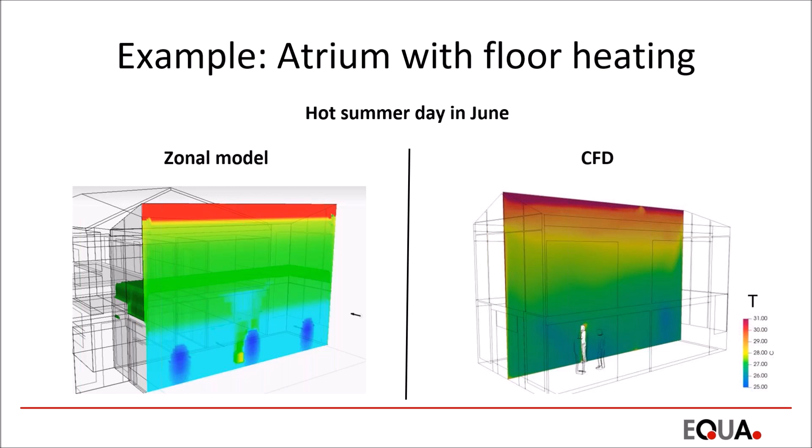Here it's about 31 degrees near the roof, but it's very similar in both CFD and in the new zone model. As far as I knew, these models were not in any way made to be similar - they were made to be identical with identical input, but not tweaked to be similar. That was just pure luck, I guess. But I definitely think this is very convincing that we can use these. It's not CFD, but you can still see lots of things that was impossible before.

Before questions and answers, I'll just mention that we will have another webinar, the second in these detailed webinars about climate-based daylighting, on February 23rd. I hope you join us then. It will also be very interesting because there's lots of new stuff there as well.